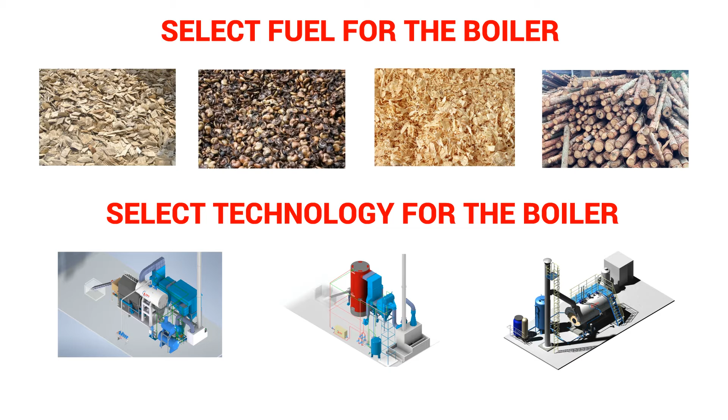Today we'll share our experience in choosing fuel for boilers in Vietnam, as well as the right boiler technology for that type of fuel, so that you can get the lowest production costs while maintaining environmental standards. Combustion fuel accounts for 90% of the boiler's steam production costs, and combustion technology determines most of the environmental emissions problem. Therefore, choosing the right fuel and appropriate combustion technology will help us not only optimize the cost of steam production, but also ensure environmental standards, peace of mind for production.

About the former, we'll talk about choosing the right fuel in Vietnam. In Vietnam, there are many popular fuels, such as diesel oil, gas, coal. These are fuels that you can easily find anywhere in Vietnam, but they are classified as high-cost fuels in Vietnam. As we all know, up to 3/4 of Vietnam's territory is mountainous, stretching from north to south.

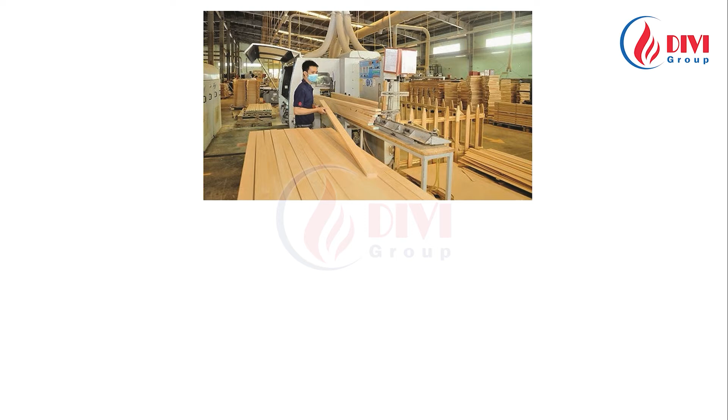A very large part of this area is currently being planted with industrial crops such as rubber trees, acacia trees, and eucalyptus trees, mainly to supply wood for the wood processing industry. Therefore, there are various types of waste products from this industry, such as sawdust, chopped wood chips, and tree branches. Currently, the supply of these fuels is very cheap and easy to buy in all regions.

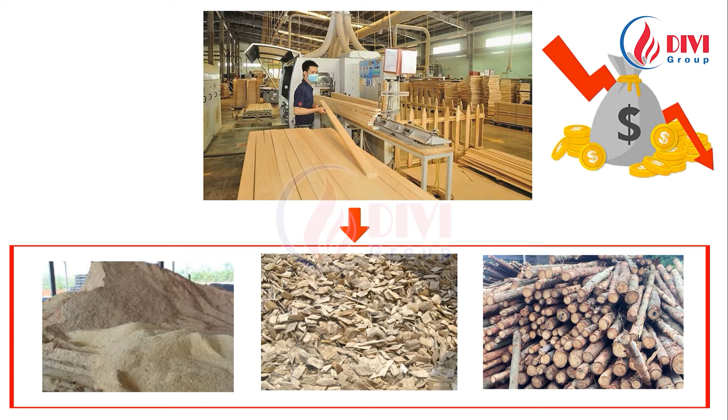Moreover, in Vietnam, some regions also have their own specific fuels. For the western region, including 13 provinces, the supply of crushed rice husk, firewood, and rice husk pellets is abundant, but the price varies by season. In the western provinces, it is also possible to use a backup fuel source, which is imported coal from Indonesia, also quite cheap, usable when the price of rice husk fuel is high.

For the south, including Ho Chi Minh, Dong Nai, Binh Duong, Binh Phuoc, Tay Ninh, Ba Ria Vung Tau, and Binh Thuan, there are many fuel sources with very large output and very cheap prices, such as chopped wood chips, sawdust, crushed rice husk, cashew nut residue, firewood, rice husk firewood, and coal fuel imported from Indonesia.

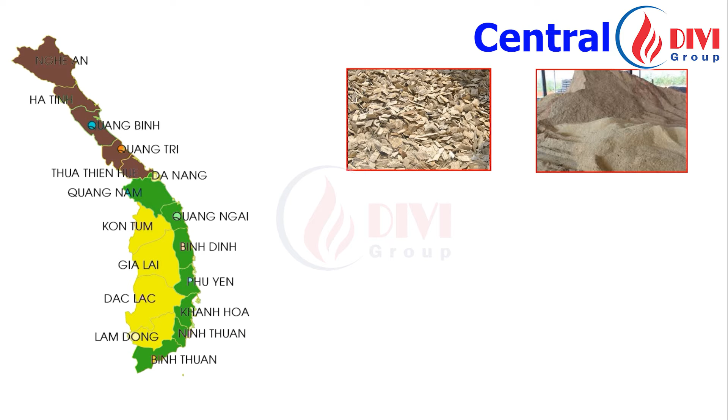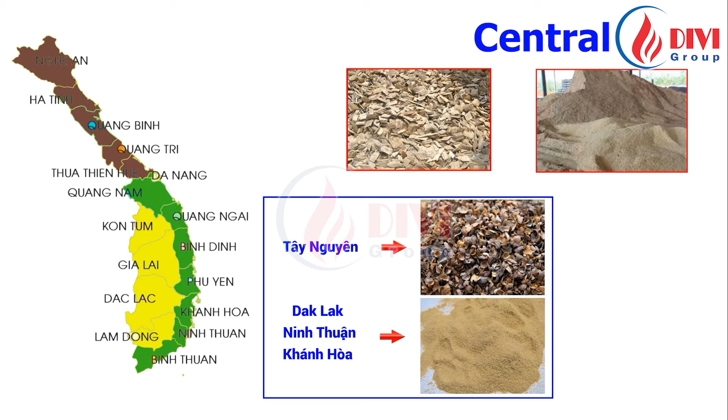For the central region, chopped wood chips and sawdust are the two main fuels with abundant reserves and low unit prices. There are also some typical fuel types: the Central Highlands region has an additional fuel source, which is coffee husks. Dak Lak, Ninh Thuan, and Khanh Hoa have crushed rice husks as other fuel sources. In the central region, there are also sources of coal fuel imported from Indonesia, transported from ports in the southern region, but with a slightly higher cost than in the south.

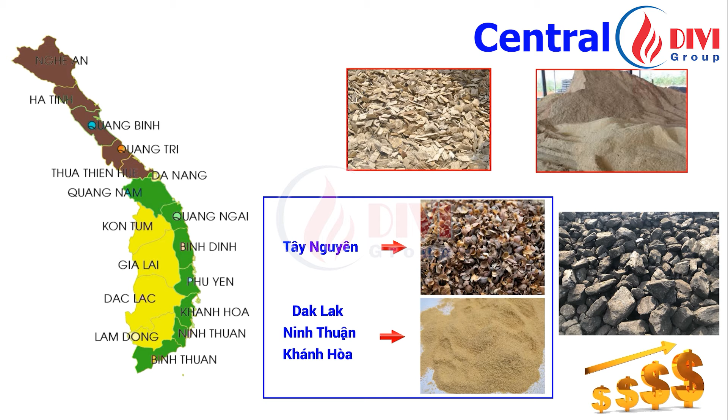For the north, in addition to fuels such as chopped wood chips and sawdust in large quantities and cheap units, this area also has quite popular fuel sources such as firewood, coal imported from Indonesia, and rice husks found in some provinces of the Red River Delta, such as Thai Binh, Hai Phong, Nam Dinh, and Ninh Binh, but the quality is limited due to not focusing on cultivation in this area.

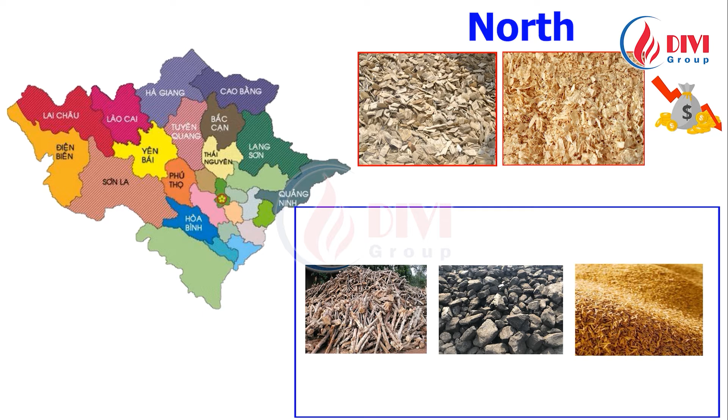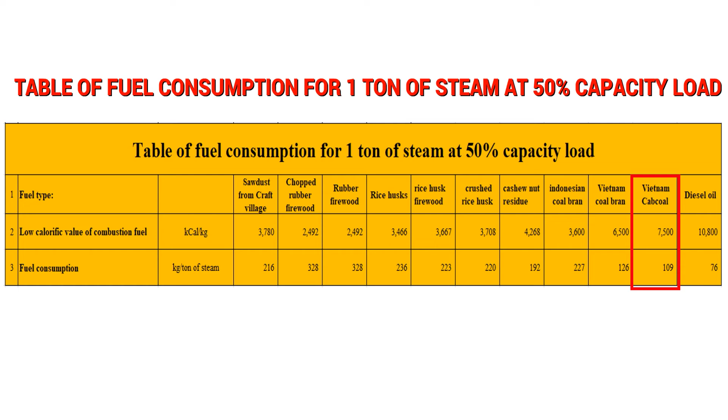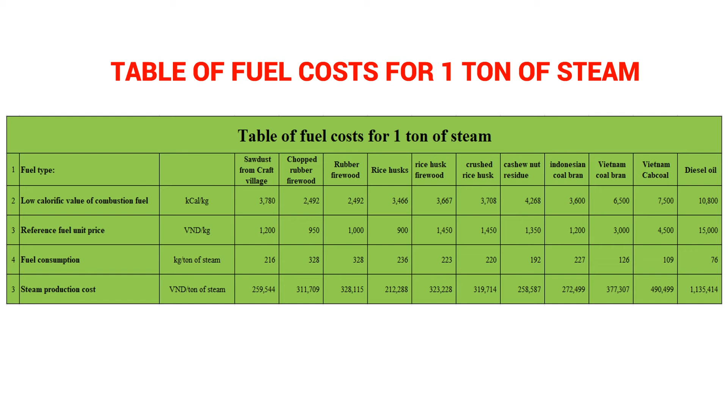But based on these two factors alone, we still cannot conclude which fuel creates the lowest steam production cost for customers. To make an accurate assessment, let's look at the table of fuel costs to produce 1 ton of steam. To avoid confusion, we'll take a close look at the indicators based on the chart for visualization.

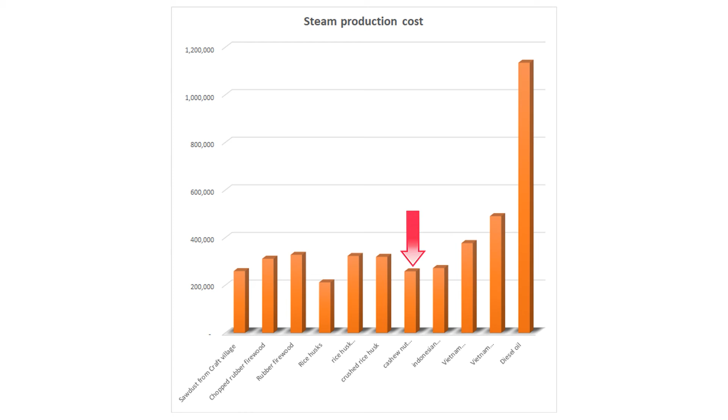We find that there are 8 types of fuel that can help us achieve relatively low production costs of steam: craft village sawdust, rubber wood chips, rubber wood, rice husks, rice husk firewood, crushed rice husks, cashew residues, and Indonesian coal bran. So if you're investing in a factory in any part of Vietnam, you can choose a fuel like our analysis above, which will give you a sustainable cost of steam production.

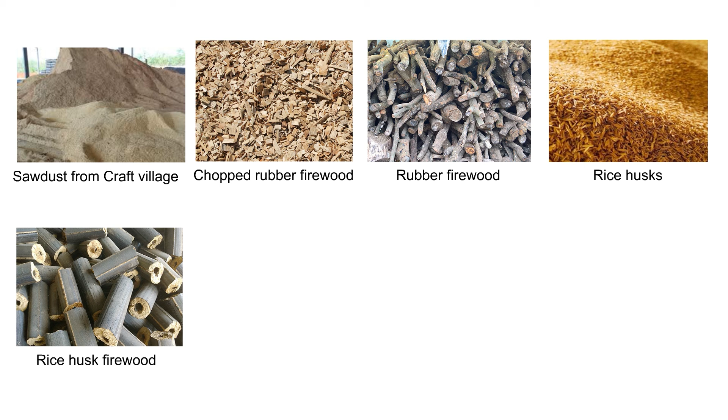We have identified fuel types with low steam production costs in Vietnam. Now we'll go into selecting suitable combustion technology for these fuels to ensure the environmental standards regulated in Vietnam are met. About this, choosing the right technology is key.

As we have seen, fuels with low steam production costs are fuels with low calorific value. According to the world's experience for hundreds of years, to burn fuels with low calorific value, fluidized bed boiler technology is the most optimal choice to ensure fuel combustion efficiency and address environmental issues.

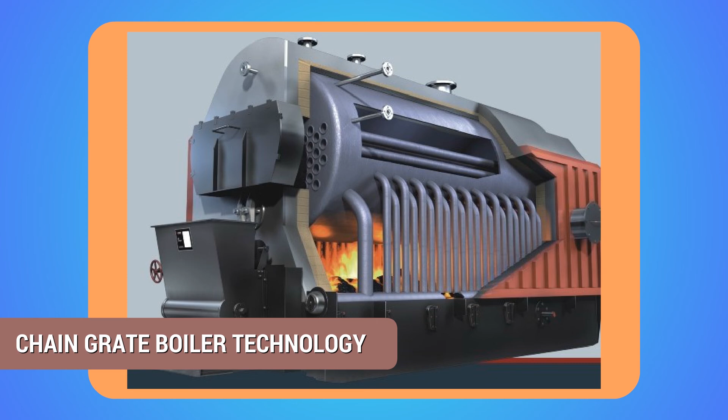Fluidized bed boiler technology in Vietnam is also quite common and is completely controlled domestic technology. In addition, there's chain grate boiler technology that can also burn some of the above fuels, but the requirements for input fuel quality must be higher, as follows.

The fuel must be dried to a moisture content of less than 30%, and the fuel particle size should not be less than 10 millimeters. These two requirements cause the fuel unit price to increase, leading to higher production costs. If these conditions are not ensured, the fuel combustion efficiency of the chain grate boiler is not high enough and does not fully meet environmental standards according to current Vietnamese regulations.

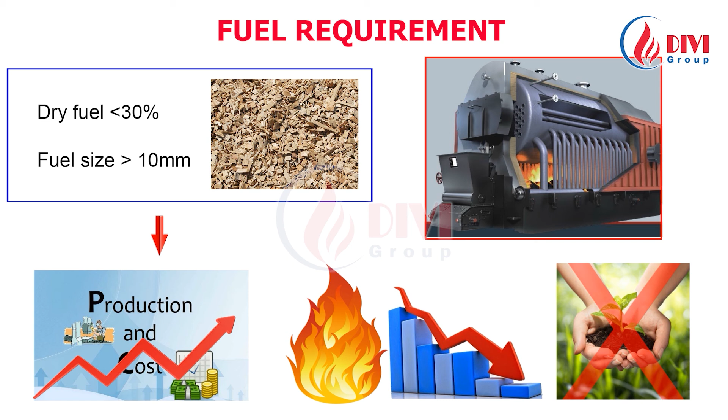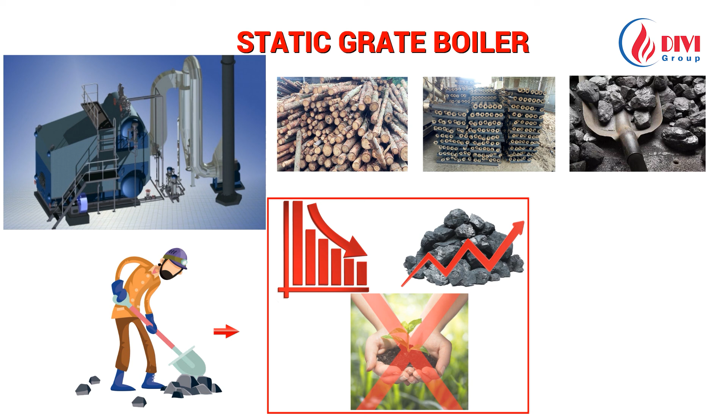Besides, we also have the static grate boiler. This type is suitable for burning large-sized fuels such as wood, rice husk wood, and large coal. The process of supplying fuel to the boiler is carried out manually, so it depends quite a bit on the operator. This leads to relatively low efficiency, high fuel consumption, and unstable environmental standards. But the advantage of the static grate boiler is lower investment cost than the fluidized bed boiler and chain grate boiler.

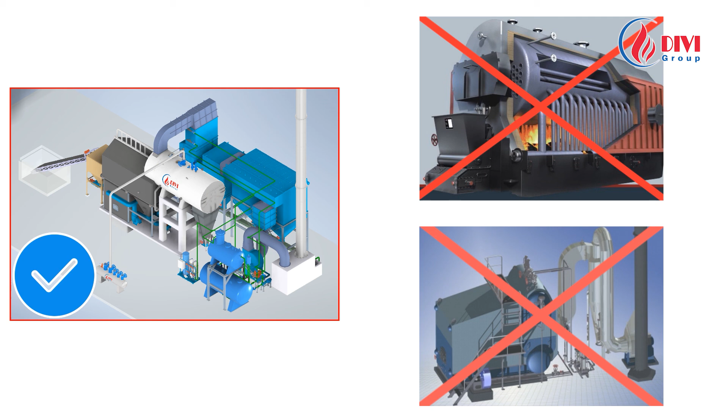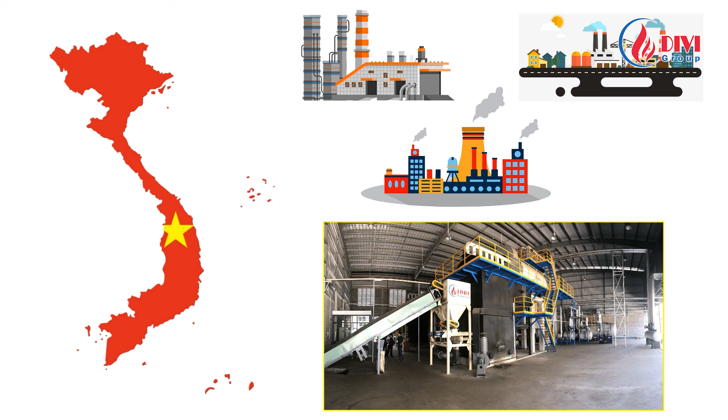Thus, fluidized bed boiler technology is the most reasonable solution if you want to make a new investment or replace the boiler in Vietnam. To learn more about fluidized bed boiler technology in Vietnam, you can watch more videos on Divi Group's YouTube channel. Above is our basic advice for you to have an optimal option when investing in a factory in Vietnam to get the lowest production cost while still ensuring current Vietnamese environmental standards.